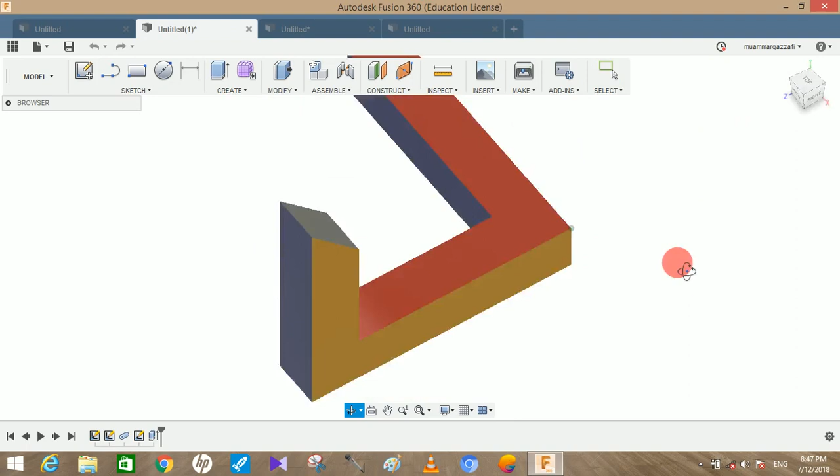In this video tutorial we are going to make this 3D geometry which, from a particular view, seems to be impossible - it's called an impossible triangle. But if I rotate the camera, you can see it's a normal 3D sweep around that particular path. So if you look at it from a particular angle, it seems to be an impossible geometry. This object is completely 3D printable, so you can 3D print it through your 3D printer.

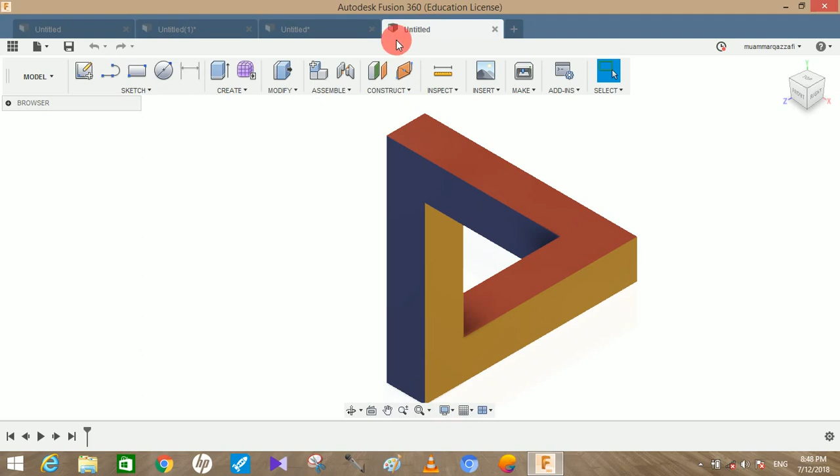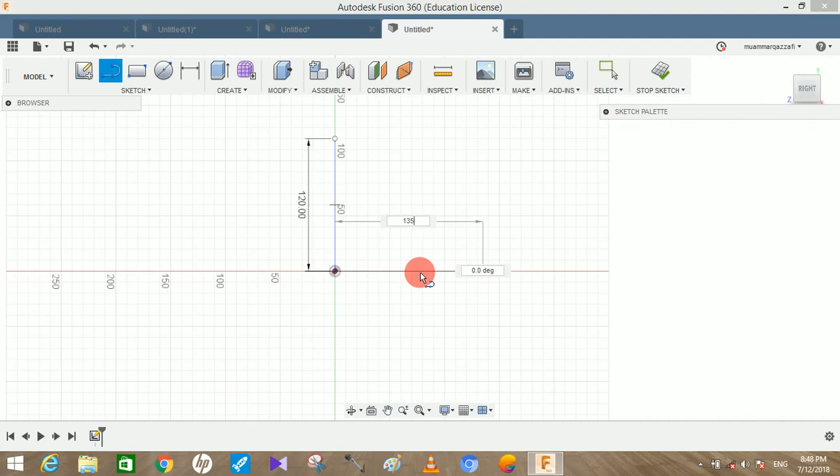Let's make it, it will only take a few minutes. Switch over to the front plane and create a sketch. On the front plane, draw two lines, one horizontal and one vertical. The length of the vertical line will be 120 mm, and the length of the horizontal line from the origin, going to the right side, will be 135 mm. Yeah, 135 mm, and you can stop the sketch.

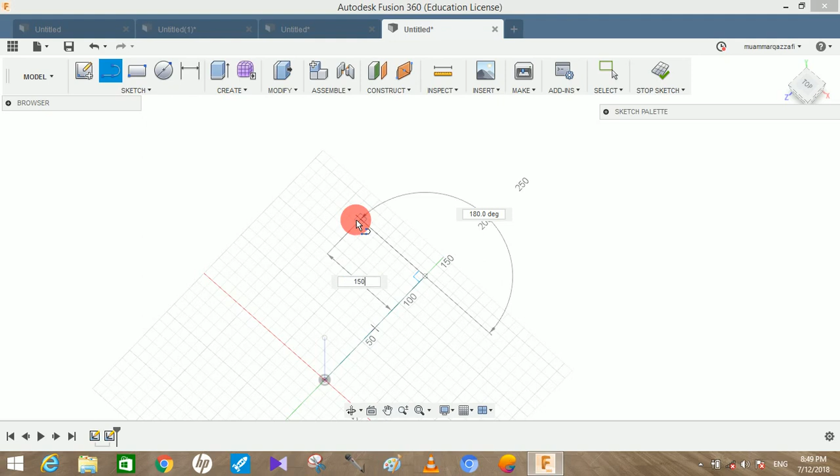Now click on create a sketch, and click on the bottom plane. From the end point of the second line you drew, draw a horizontal line of length 150 mm, and press OK, then stop the sketch.

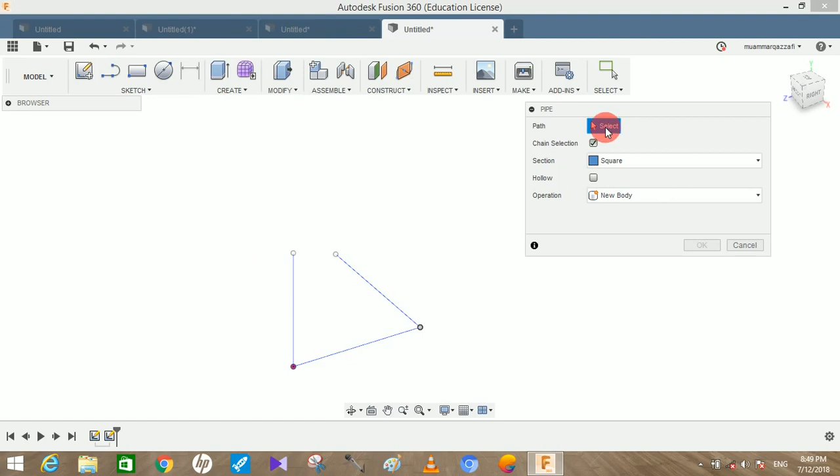Now you can see we have a sketch in 3-dimensional, one on the front plane and one on the bottom plane. So next, go to create and go to pipe. Select the section, choose square, and it will ask about the path. For the path, select all three lines. Let me just select it from here.

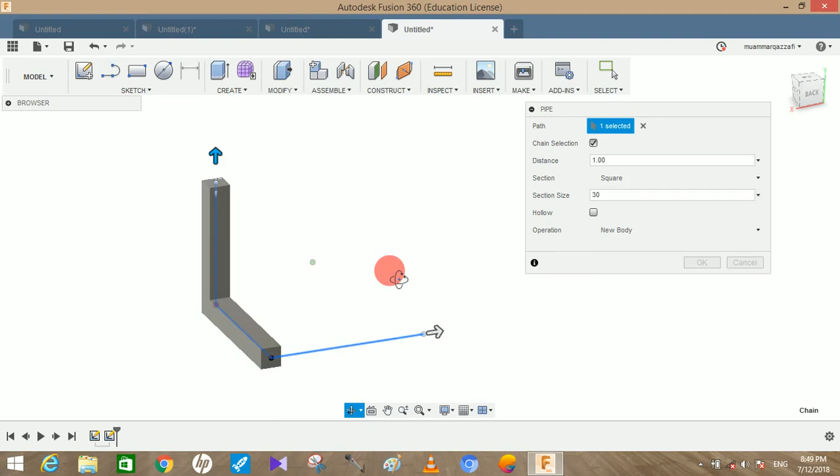Give the section size as 30 mm. Why is it not taking it? I think there's something wrong, let me select it again. Okay, let's try something different, because I think there's still something wrong with Fusion 360. I tried this method earlier and it worked, but it's not working this time.

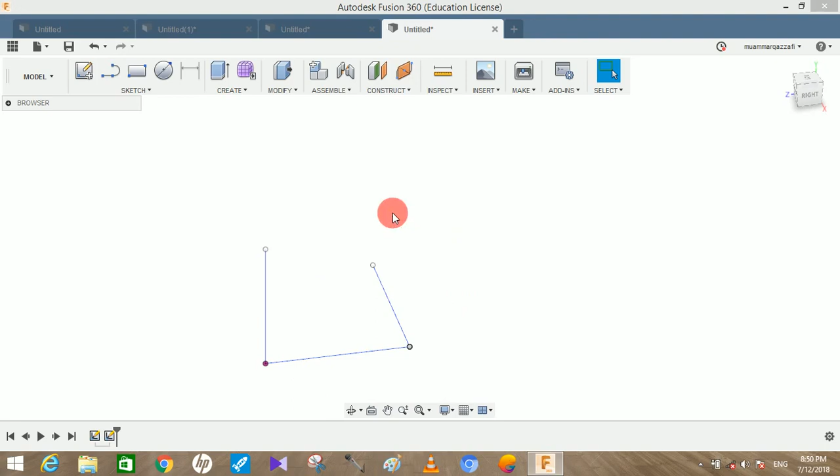So let's go to construct, and click on plane along path. Just create a plane along this path at the starting point. Drag it over to the starting point and press OK. Now from here, click on this and click create a sketch.

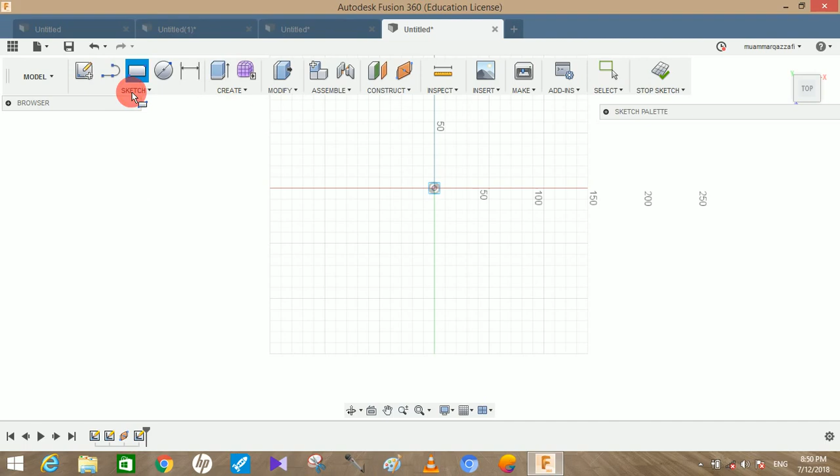At this point we have to draw a square of 30 mm length. Click on sketch, go to rectangle, click on center point rectangle, and from this origin point draw a square of 30. For the other dimension, click tab to switch over and type 30, then press OK and stop the sketch.

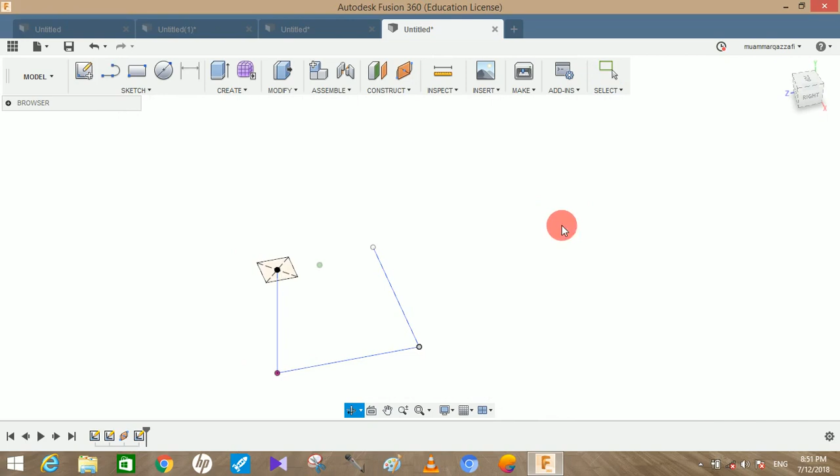Now we have to simply make a sweep. Go to create and go to sweep. It will ask about the profile - select the profile of the square we made, and the path will be all three lines. So yeah, now it worked. This time it worked - I think there was something wrong with that command earlier. Press OK.

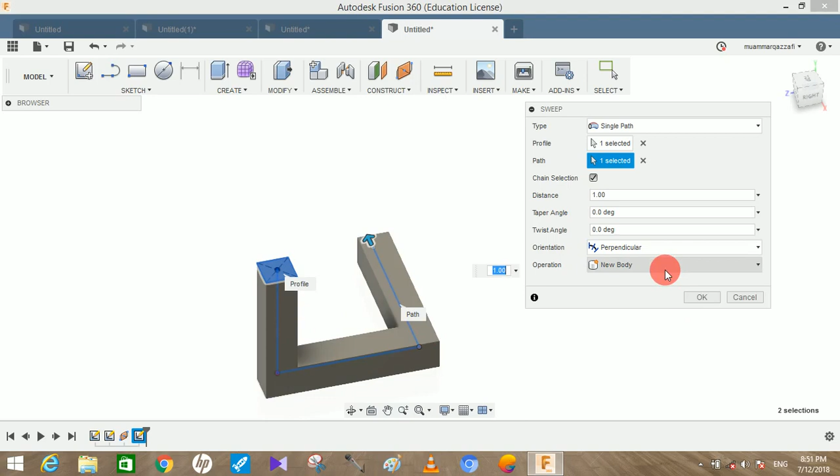That was the shortcut method, using the pipe command - it only takes a few seconds. I drew this one using that method only. As you can see in the timeline, this is the pipe command which was used. I don't know what's wrong with Fusion 360.

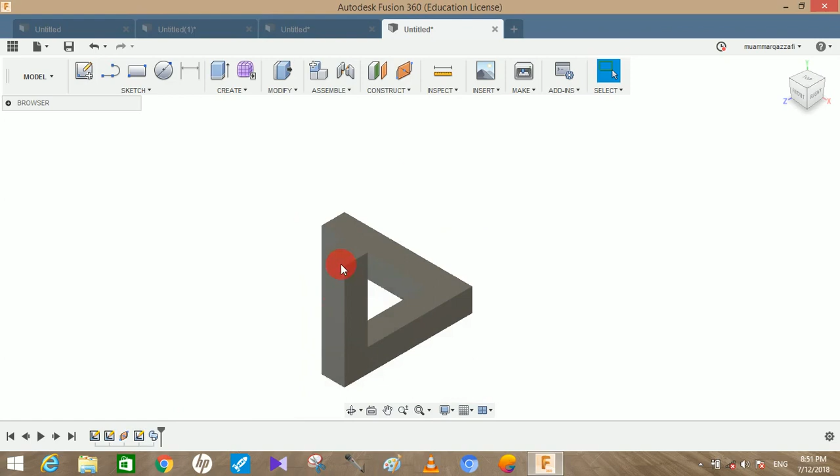Now if I switch over to the isometric view, you can see that it's not looking right. Let me go to visual style and shade the visible edges. Now you can see that it's not looking pretty much, so we have to click on this face and create a sketch.

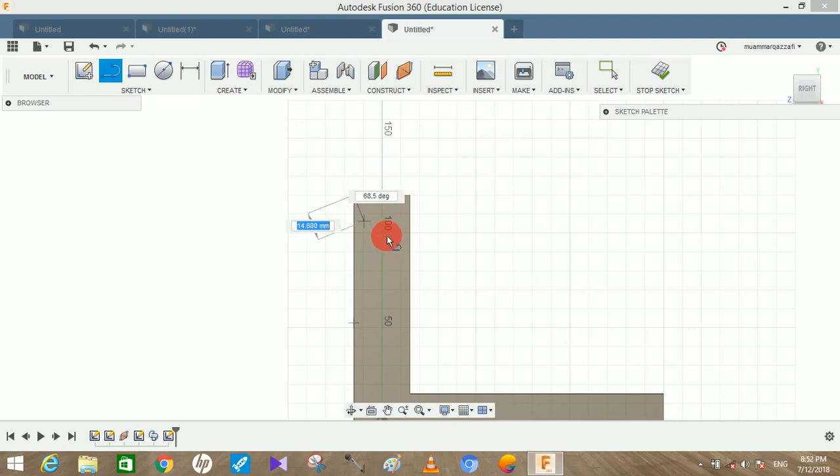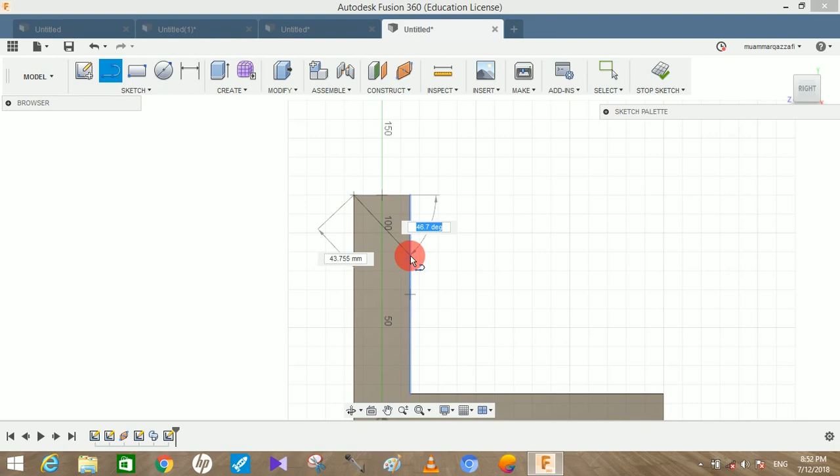From this point, draw a line at 45 degrees from the vertical plane, joining this. You can click the tab button to switch between entering the degree and the length of the line. So now it's asking for the length - if I click tab, it will ask me to type the dimension or type the degree. We write 45 degrees and press enter. Now we can see there's a line at 45 degrees joining this point to the vertical line.

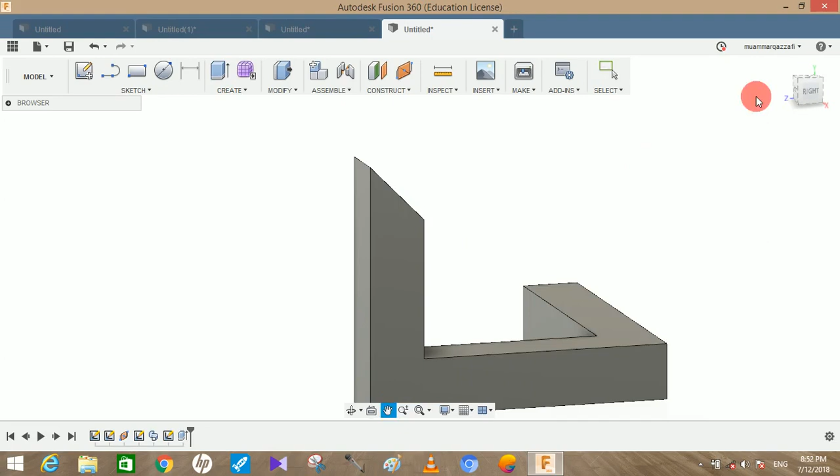Next, click on extrude, select this face, and extrude cut through all the back surface, then press OK. Now if I switch over to the isometric view, you can see it's similar. To make a better view, you can hide these visible edges - go to visual style and click on shaded.

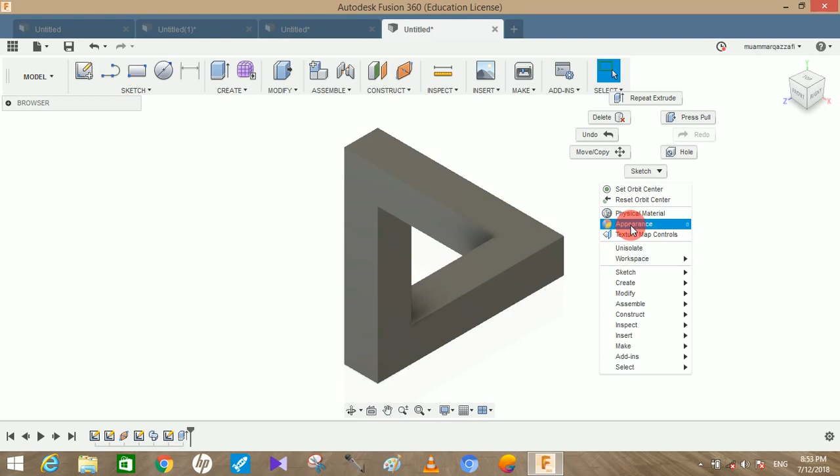I think something is wrong with this, it's always shaded. Let me just - yeah. So to see this better, you can render it too. Let's go to appearance and add some appearance so it looks even more interesting. My system is a little slow, as you can see it's not responding.

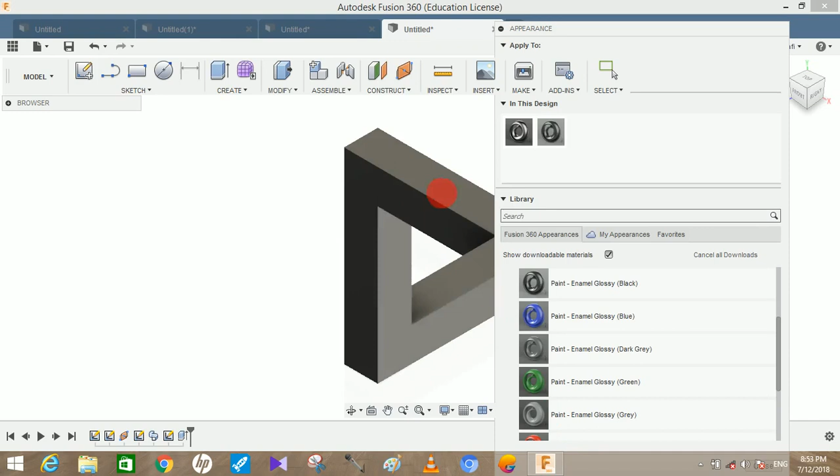Go to appearance - I would like to have paint, glossy. Switch over to the face. Let this be black, I think black would work. Now this will be red, and let's make this yellow.

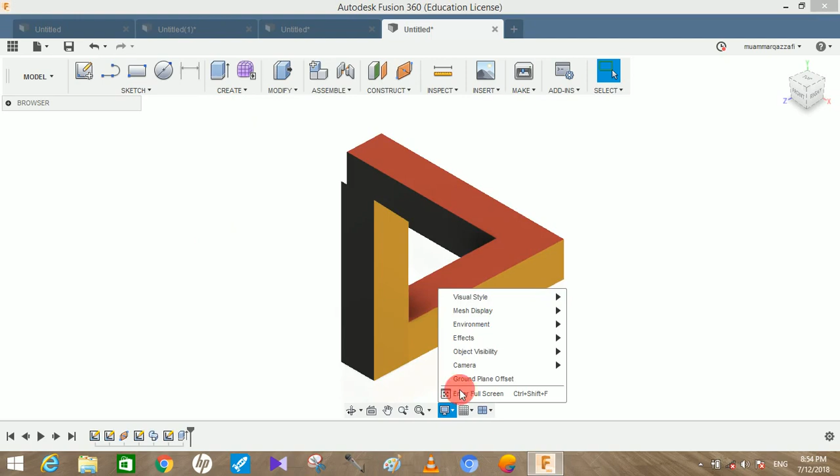Now you can see that from this point, it's looking like a 3D object. If I switch over the camera, you can see it's a completely different 3D object. So now you can change the visual style back to shaded only for better appearance.